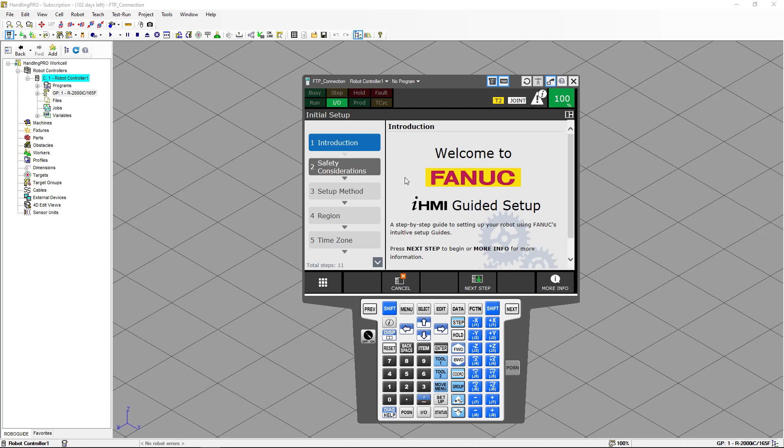If you want to do a backup, you go to Menu, Files, Files again, then Utilities, Set Device, and we're going to select the USB port on the teach pendant.

One thing we can do is create a new directory inside the USB drive. So we select Utilities again, and this time we select Make Directory. It gives you the option to name the new folder, and we're going to call it Backup.

So now we are inside the backup folder, and we are ready to do the backup. We're going to select Backup, and from the list we select all of above. That means we're going to do a backup of the system files, the TP programs, applications, and anything else that is on this list.

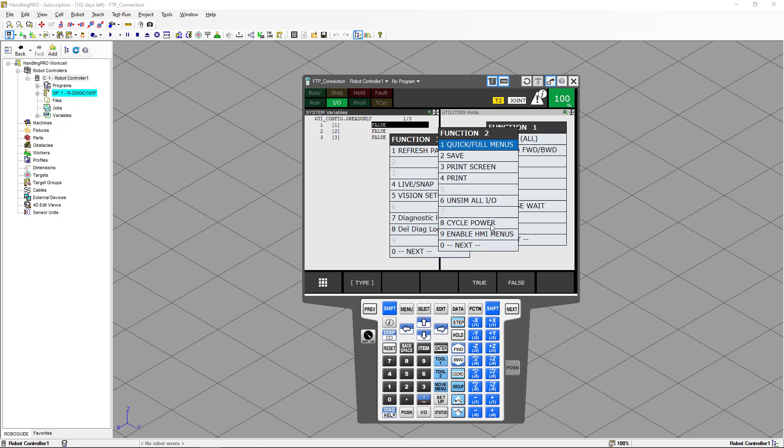So the next step is going to be to go to Function, Next, and Cycle Power, to make sure that the configuration takes the IP addresses. I'm going to pause the video for now.

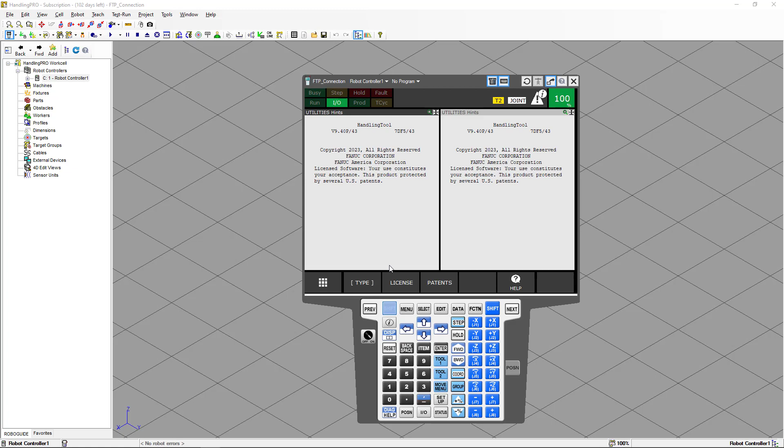Now we are back in RoboGuide. We're going to select again Setup and Host Communication, FTP. And you're going to see that RoboGuide has now assigned a new IP address, which by default is 127.0.0.2. So we already have the Ethernet connection established on the robot side.

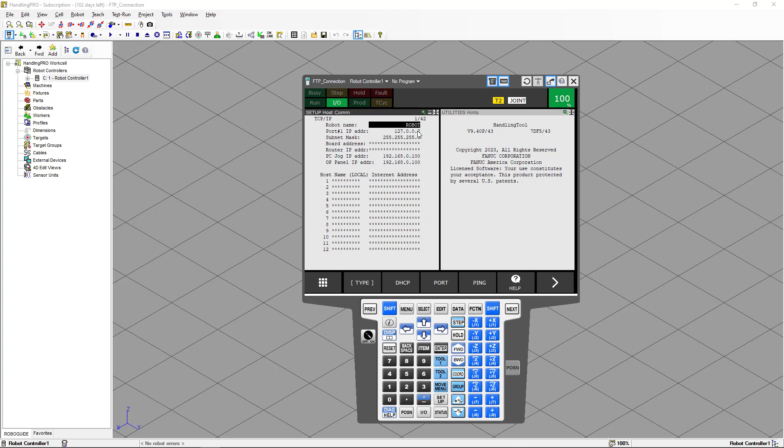We are ready to start looking at the FTP connection. One easy way to do an FTP connection is using the command prompt. So we're going to open the command prompt window.

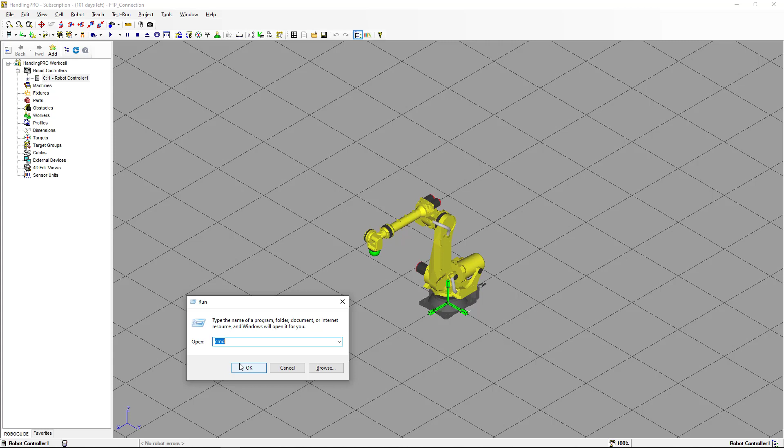We're going to press the Windows key and the R key, and we're going to get the run window. Here we're going to type cmd, and the command prompt is going to pop up. My personal preference is to change the background color, so we're going to select the bar on top, go to properties, and change the screen background to white and the screen text to black. The changes won't apply until we close the window and open it again.

The first thing we're going to do is ping the robot. So we're going to ping 127.0.0.2, and the robot responds. So we have a connection to the robot.

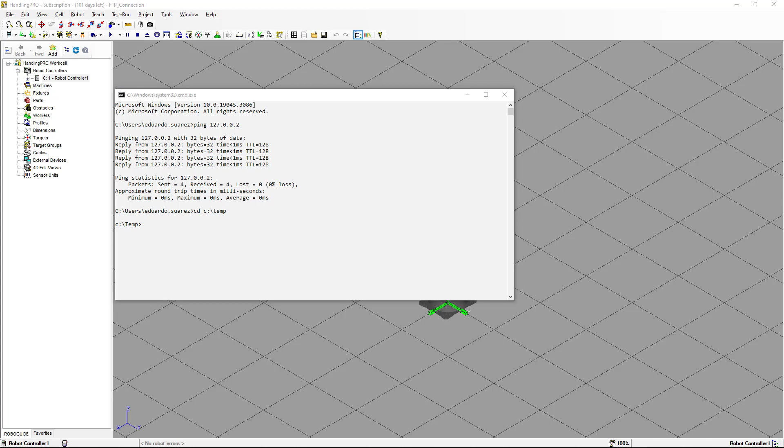Now we're going to change the directory to the temp folder, and everything we're going to do now is going to be in the temp folder.

If we type FTP / and the question mark, we're going to get a small help menu with some of the commands we can use. You can see here in the notes that the mget and mput commands take yes, no, and quit. We're going to see that in a moment.

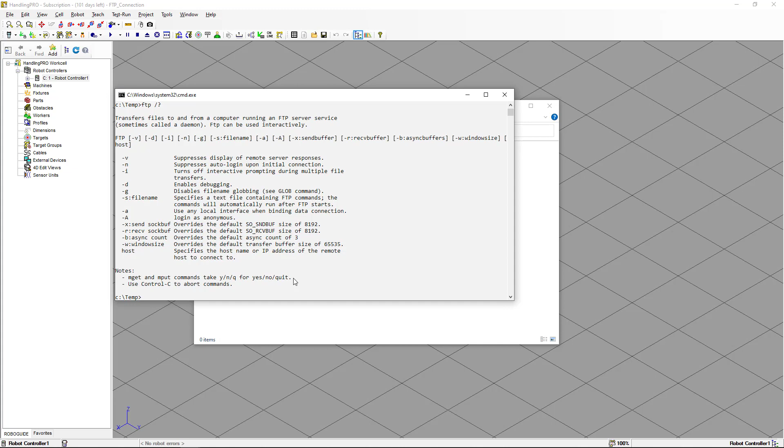For now, we're going to clear the screen and type FTP, and add the IP address for the robot. In this way, we're going to establish a communication with the robot controller.

Here it's asking for the username. In our case, the username is anonymous. So we just type enter, and we are logging in to the robot controller.

The first instruction we're going to use is bin, and bin stands for binary. All the files in the robot controller are binary type, so that's the way we're going to transfer them to our laptop using the FTP connection.

Now we can type the next instruction, which would be get, but before we do that, we're going to open the teach pendant and create a new TP program.

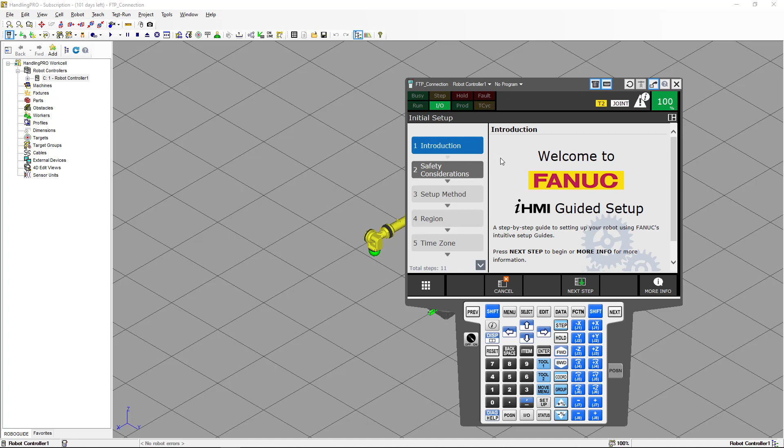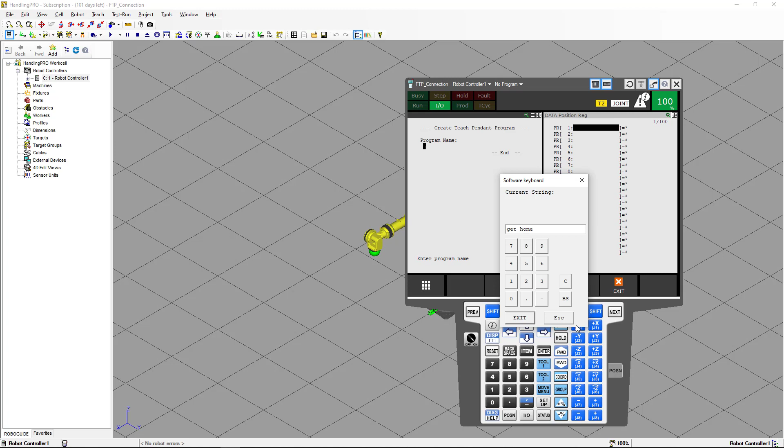We're going to click on select and create one very simple TP program. Go home. And we're going to put an instruction there, the position register number 1, and select the position register number 1 the way it is right now for that position. And we have our go home TP program.

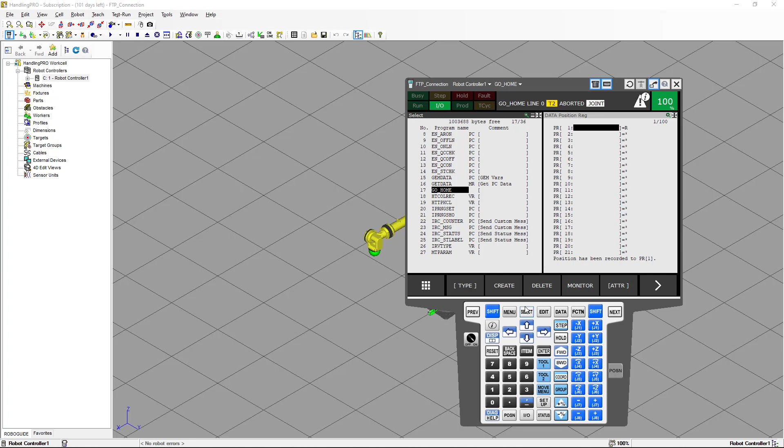So now, if we go back to the command prompt, we can use the instruction get go home TP, and you're going to see that we got the file from the FTP connection.

Now, if we're going to get more files than just one, we use the mget instruction, and in this case we can get all the TP programs. But you'll see here that when we try to do that, it's asking for each one of the files if we want to get it or not.

So if we don't want to do that every time we're retrieving files, we need to use the prompt instruction. This way, it's just going to get all the files without asking if we want it or not.

So at this point, we can delete this file and get it back using the FTP connection. So we have our file, go home in here. We're going to type the instruction put, go home TP, and we got the file back again on the teach pendant.

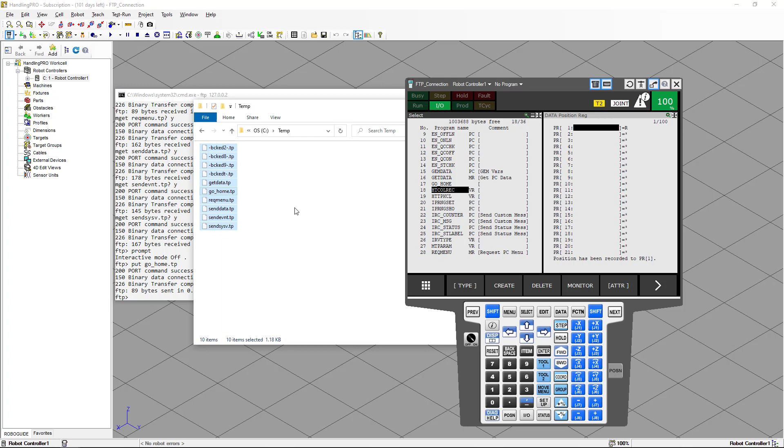What we're going to do now is delete all these files, and we're going to use mget instead of the get instruction to get multiple files. In this case, we're going to use the asterisk to get all the files. You can see now that it's retrieving all the files from the robot controller.

And when we're finished, we just use the quit instruction to finish the FTP connection.

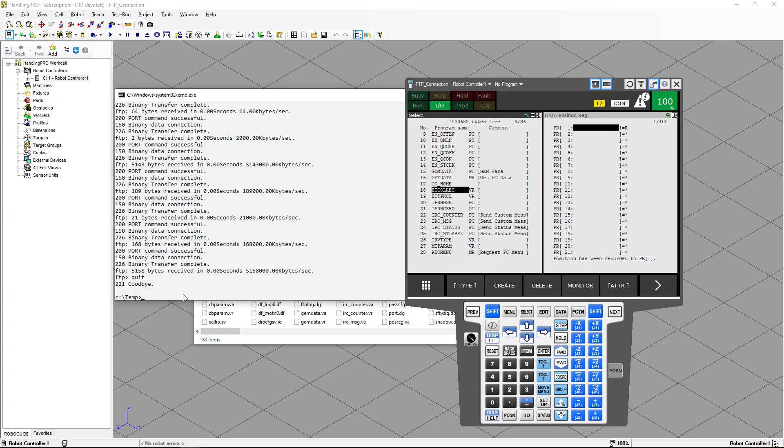You can see now all the files that we got from the robot controller, and if we compare this with the backup file from the teach pendant, we got 103 files, and the backup using the FTP connection, we got 180 files.

Obviously, we don't want to type all these FTP commands every time we want to do a backup. So now we're going to look at how to create a bat file and transfer all the commands inside the file.

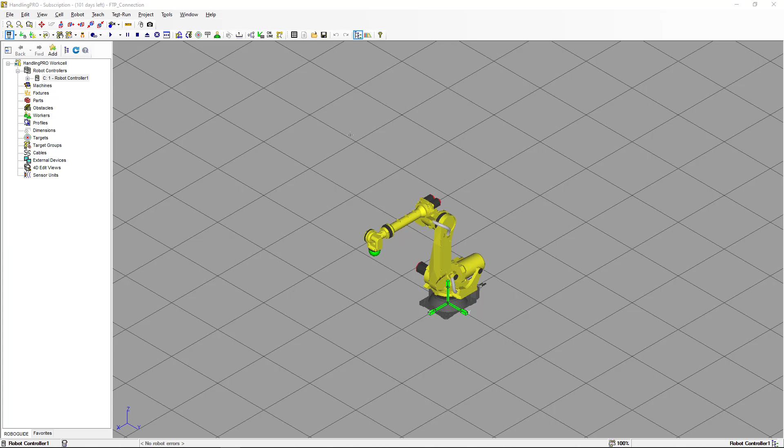We're going to open the temp folder, right click, select new, and select text document. We're going to create a new text document, open it, and save it as, changing to all files, changing the encoding format, and changing the extension from text to bat.

And now we have our bat file, and inside we can put all the commands that we want. I'm going to delete these two files for now because I've already created a batch file, and I'm calling it backup. So we're going to open this one, edit it, and you'll see inside all the instructions that I have.

The first command is echo off. That means it's not going to reply with the echo of all the instructions that we have inside the moment we run it. Next, I set the date, I set the timestamp, and I create new directories, one directory for the date and one subdirectory for the time.

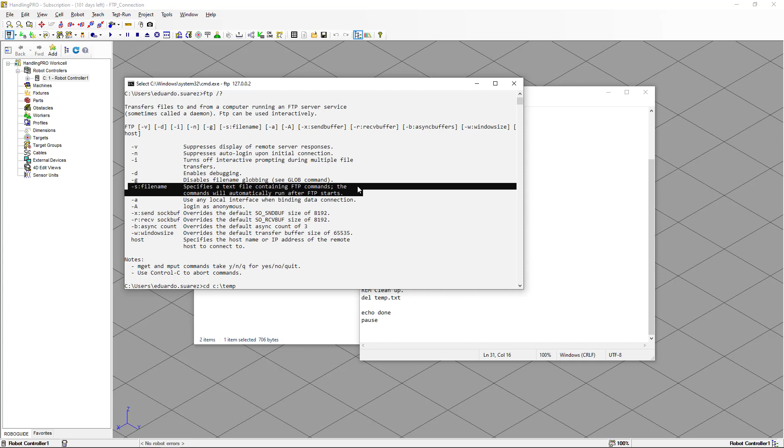We can add a file that we want to run. And finally, we want to delete the temp file, and we're going to put an echo done and then a pause to stop the program before it closes. For now, I want to show you the temp command, the temp file.

So we're going to comment this one out, and we're going to save it. And now we can run it.

So to run it, it's just a simple double click, and it's going to get the command prompt. It's going to ask for the robot name. We're going to call it robot1. We need to enter the IP address for the robot. It's going to ask for the username. We're just going to press enter, and it's going to start transferring the file from the FTP connection.

You want to see the files, we need to go one level up, and here it created the folder with the date. Inside we have the folder for the time, and inside we have the folder for robot1, and all the files transferred from the robot controller.

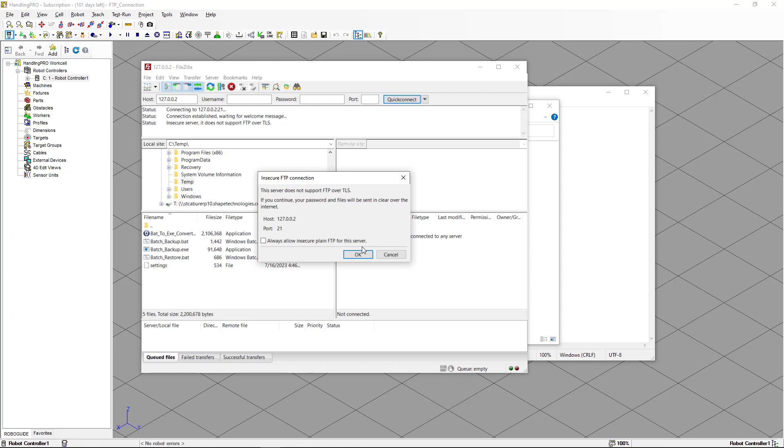Once it is already installed, we're going to open it up, and it's going to ask for the IP address for the host. We're going to type the IP address for the robot and select Quick Connect. You're going to see a pop-up window saying this server does not support FTP over TLS, and that's right, because the robot controller only supports binary FTP connections.

So we're going to close this window. We're going to select File, then Site Manager. On the Site Manager, on the left side, you can select a new folder and new site, and customize and arrange the folders for your FTP connection to different robots. In our case, we're going to select new site and call it Robot 1.

On the right side we have the General tab. Here we're going to select FTP. We're going to type again the IP address for the robot's FTP connection. On the Advanced tab, we're going to select DOS. We're going to go back to the General tab, and it's going to ask for a user. We just need to type a user, and it doesn't matter which user we select. Then we select Connect.

It's going to ask if you want to abort the previous connection and connect in the current tab. We select OK. Now you can see that we have an FTP connection already created with the robot controller. We have all the files on the robot controller, and on the left side we have our temp file and temp folder. We can transfer files if we want by selecting and dragging — we can go from the robot controller to the folder by simply clicking and dragging, or the other way, from the laptop to the robot controller.